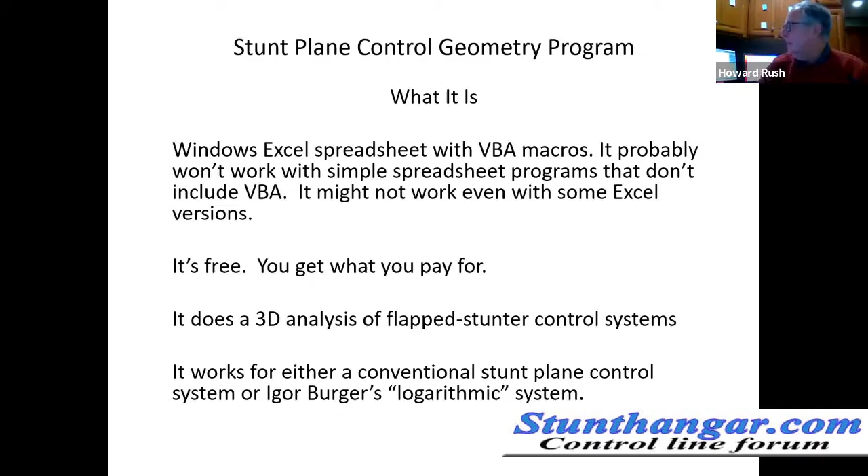Let's see. What it's good for. There's my microphone. I'm self-muting. Relationship between control line motion and control surface motion. So you can see if your control system's linear and symmetrical. If it's not, you can fiddle with the input parameters to improve linearity or symmetry.

And it can show you the mechanical advantage your system has over control surface aerodynamic hinge moment. It takes a torque to deflect the flap into the wind. Elevator, not so much, because the elevators kind of go in the same direction as the wind, and it's little. But deflecting the flaps requires pretty big torque on the flaps. And this torque we call control surface hinge moment. So you stunt people think of moments as a distance, but in general engineering talk, a moment is a torque.

And there's a spring between your handle and the airplane, namely the control lines. They bow back in the wind, and they also have elasticity. And so you're controlling your airplane on the other end of this spring and trying to bend the flaps into the airstream. And I think that you want to minimize the difference between the force in each line to minimize the spring effect. And therefore, you want to maximize the amount of lead out travel per unit of flap deflection. I put in a wrench analogy there.

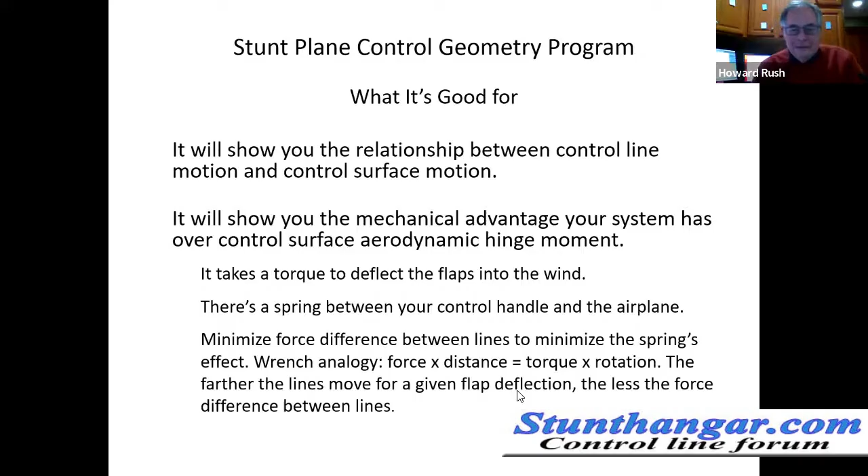I think the hinge moment thing is important, and having leverage over it is important. And how to use the program. It says, behold the definitions and assumptions. Now, at this point, I have to switch programs, and we've been practicing this, and I'll see if I can do that. When you open the program, it comes up on this definitions and assumptions page.

And you look at that to see what I call zero and which way is positive, like sideways is positive out the right wing and stuff like that. And the assumptions, like, doesn't work for self-centering Bellcranks and a lot of stuff. So check that out. And then now back to, we'll return to the program shortly. Okay.

Behold the variable names and signs on the PDF picture. Along with the program, I throw in a couple pictures that have the names of the variables on them and look like this, which you can't see here. And the variable names are kind of funny, but what they are is the names I use in the VBA program. And this uses standard airplane sign conventions, which I don't know whether you know or not. But the sign conventions are on here.

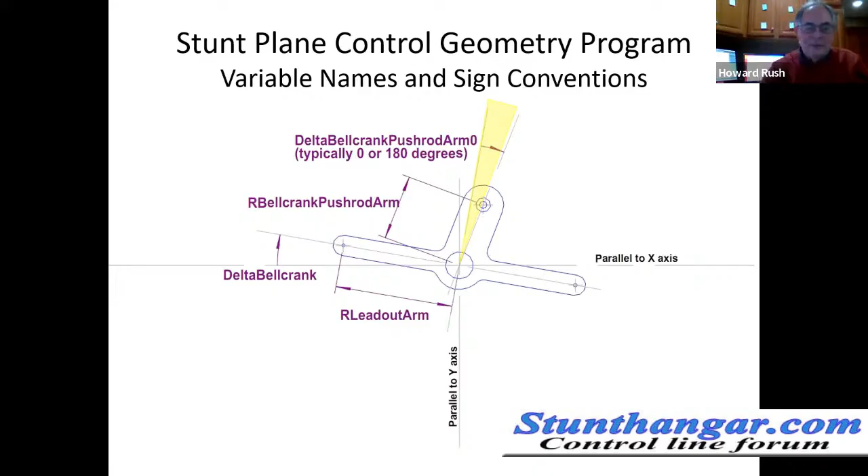Let me call to your attention the Bellcrank cartoon. There's one parameter here that turns out to have a big effect on the control system symmetry and linearity. And it's this guy right here, from the perpendicular to the axis of the bell crank. And I'll show you more about this later. But when you're messing with this yourself, be sure to fiddle with this dimension. Try stuff out because it has a big effect often. Okay.

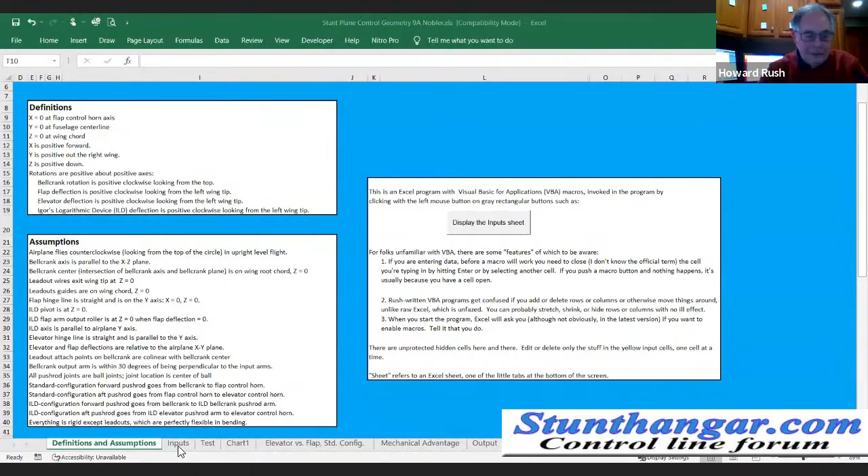Now it says, go to the input sheet, your values. Now we're supposed to show the input sheet. It's supposed to show the input sheet. Here is the input sheet where you put the stuff. And you see that? See the yellow stripe there? Yes. Yeah, good. And let me point out the sign convention thing. Heed the sign conventions.

By standard airplane signs, distances out the left wing are negative. So the distance to the left wingtip where the lead out guides are is a negative number. Well, when I put in Nobler numbers as an example, this is a Nobler, and I forgot to make this negative, and I spent much of last Saturday trying to get this thing working because I forgot to put in a negative number.

Likewise, the elevator, zero in the fore and aft direction I've defined as where the flap control horn axis is, the crack between the wing and the flaps. And so the elevator's aft of that, and in our sign convention, the X is forward. So that's a negative number. And I've mistakenly made a canard before by entering a positive number there. I should have a warning that pops up when you enter positive numbers for these things. It ought to be negative, but I don't. So just be aware. Some things are kind of weird.

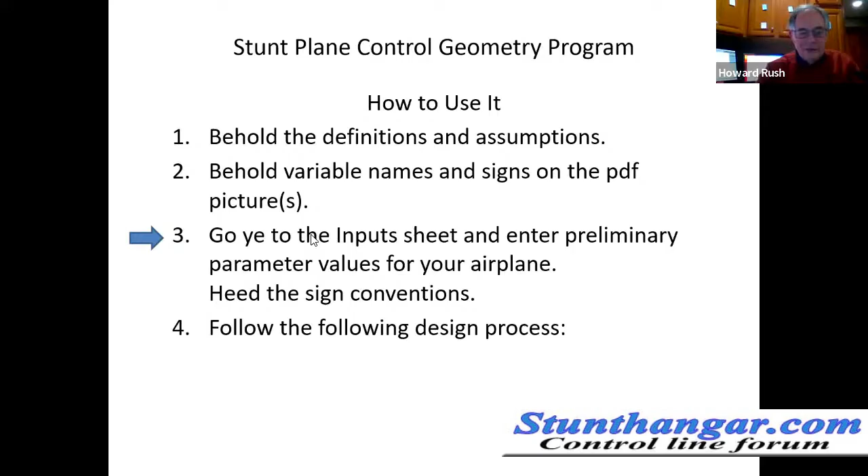Now, we'll talk about the design process, what I think the design process ought to be. And I'll have to go back to, so that was a pretty fast transition, all of the design process. First, pick a maximum flap deflection. Don't pick any more than you need because you'll be sacrificing leverage over the system. Can you see that now, Charles? Pick maximum flap deflection. Good.

Yes. Sometimes I see things here and I'm the only one seeing them. The default is 30 degrees, and I've always used 30 degrees because I don't know what the maximum flap deflection ought to be. And I don't know if the program works for anything else. It probably does. I suspect that we don't use any more than 20 degrees. I got instrumentation on my airplane, but I haven't recorded it yet. So I'll find out how much my airplane takes and then report that, but it might be different from yours.

We put a camera on one of Paul's airplanes once and watched its flaps, but it wasn't calibrated, or looking back on the fuselage, it's hard to tell how much the flaps move, and we didn't put any marks on it. I should have taken a Sharpie and put a mark on there at 30 degrees or something. Well, he wasn't looking.

Next, pick a handy flap control horn size. And what are we doing nowadays? About 1.5 inches. Yeah, use that. It's an independent variable, flap control horn size. Well, the way I do it, it is.

And what this does is just rotate the bell crank relative to the direction the lead outs go out. In these cases, I think they might have been ARFs, and who knows what it was beforehand, so they might have come out someplace closer to perpendicular than they started. But it's hard to fix an airplane after it's built. Use as much bell crank travel as you can get, I think, without making the system too perverted.

When you go through this iteration, I start with a lot of bell crank travel and go from there. To set the amount of bell crank travel, you change the ratio of bell crank pushrod arm radius to flap control horn radius. If you start with a given flap control horn, you make the distance from the bell crank pivot to the output hole smaller. That increases the bell crank travel.

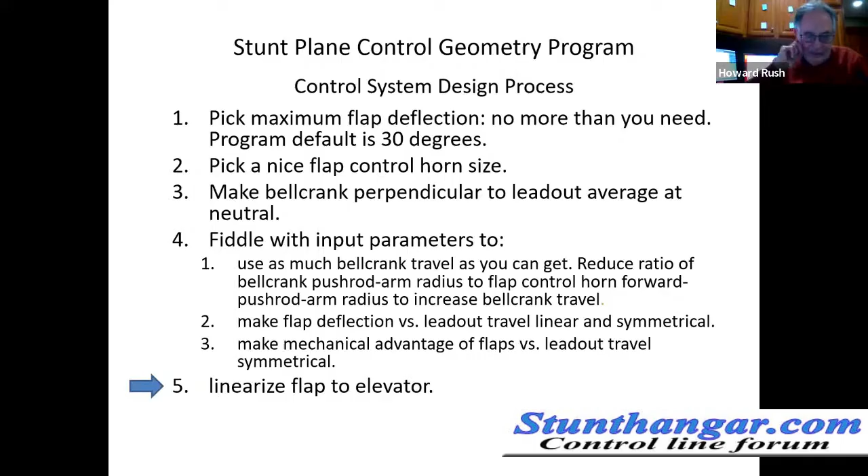After you pick a bell crank travel initially, the next thing you do is fiddle with the other parameters to make the flap deflection versus lead out travel a straight line and symmetrical, and use as much lead out in one direction as the other. And then look at the mechanical advantage sheet and try to make that symmetrical, mechanical advantage versus lead out travel. I'll show you the pictures here in a little bit. Let's see. Then after that's done, linearize the flap to elevator.

I'll go ahead and talk about that now because it's here. It's easy because it's all in one plane. Typically, the control horns and the push rod are not too far off from a plane. So you put the control surfaces in neutral and run the push rod between the control horns, make the control horn uprights perpendicular to the push rod, and you're in business. Okay.

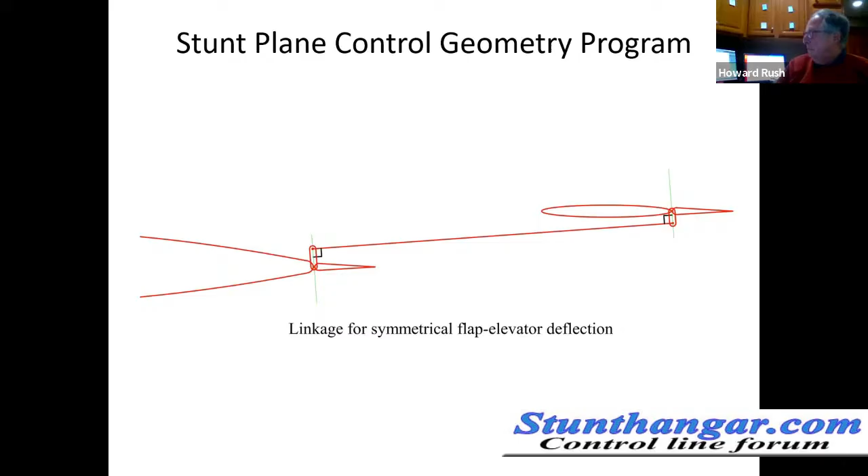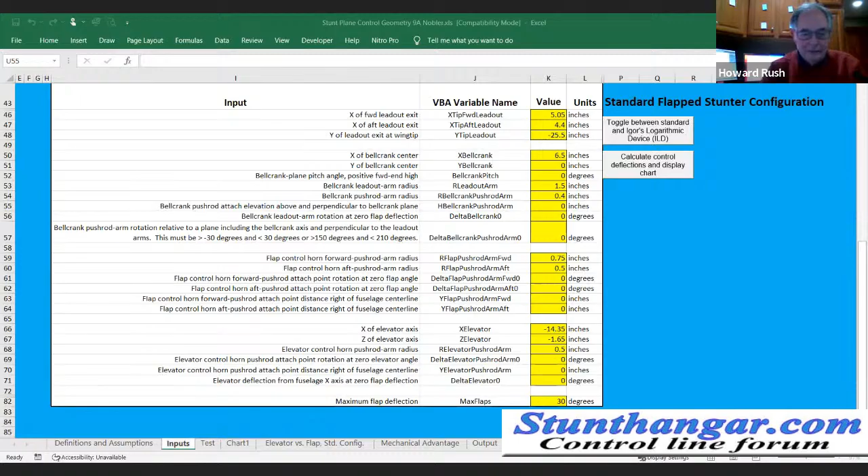Now back to the Nobler. So here's the input sheet to the Nobler. And once you've put in the initial numbers, you push that button and it will lead you to this chart. This shows the green line here, which is the most important thing. It's the flap position relative to lead out travel. This x-axis is lead out travel, and the other things are elevator and bell crank.

This shows the Nobler on the plans that George sent to Top Flite, which I got via Bob Emmett. The bell crank moves almost as far as it can, so it has quite a bit of leverage over the controls, but the shape is awful. Notice that it takes, let's see, is this up or down? Aft lead out is up, I guess. 2.5 inches to get to full up, and 3.2 inches to get to full down. So it might be more effective at the top of the hourglass than it is doing triangles. It might not be able to do triangles too accurately.

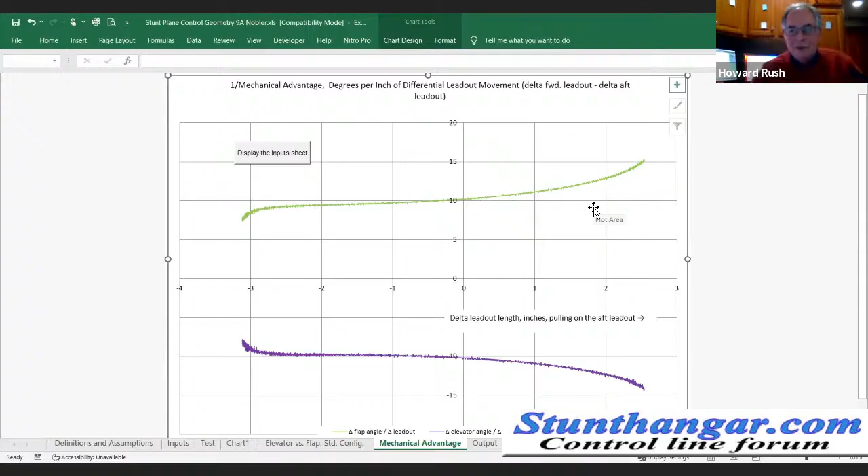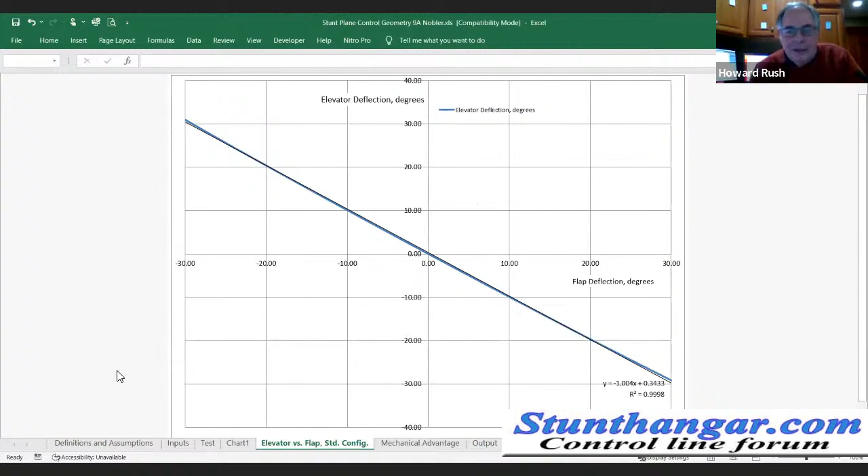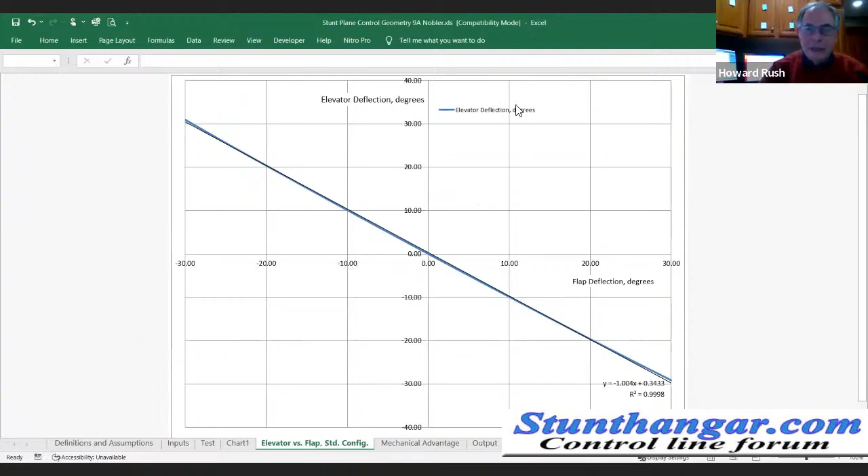Oh, yeah, this is an aside: elevator versus flap on the original Nobler is 1-to-1. You can't see it. Now you can. Yeah, you can. And I've heard rumors that it was not 1-to-1, but it is on George's drawing. Okay. Now, here's the tricky part. Well, I guess I can get there this way. I changed these items, these in the gray cells. You see them, Charles? Yes. See the gray cells. And there's the famous push rod arm rotation on the bell crank.

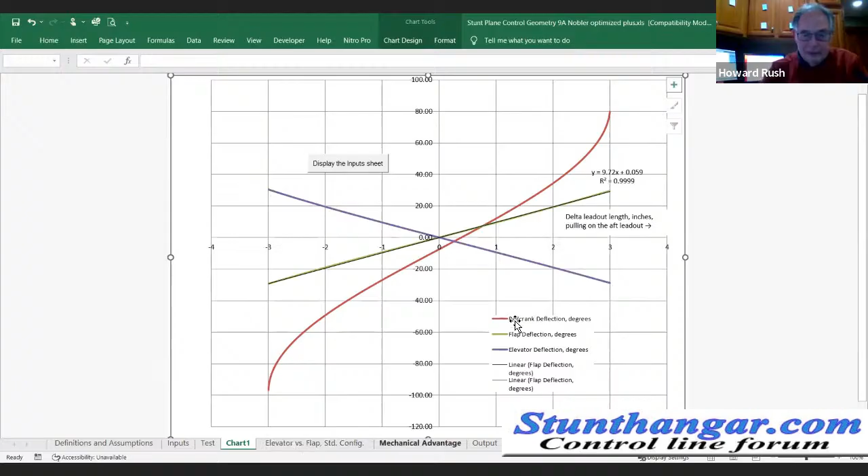Go into this chart, see, I was able to move the bell crank even more. It's almost plus or minus 90 degrees. It goes to 100 here because it's askew a little bit. It doesn't go through 0, because the lead outs go back from it, I guess. And this line's nice and straight. And mechanical advantage, isn't that pretty? It's all symmetrical now. Less than it was. And so that was pretty cool.

Now, let's see. The mechanical advantage improved by 6%, but I tacked on a 5-inch or a 4-inch bell crank just to see what would happen, and got 41% improvement in mechanical advantage, and it didn't deteriorate the shape too much.

Now, here you see a couple of bell cranks there, Charles? Yes. Yeah, amen. These are the changes I made. I moved the bell crank forward. Red is the new one, and rotated it so it's perpendicular to the lead outs. And here the output hole is askew 7.6 degrees, wasn't it? Something like that. Yeah, 7.6. And I moved the flap control horn forward.

That's where it came out. And I've been telling people that you can optimize this with the flap horn either straight up and down or forward, and it doesn't matter. But in this case, it did. And tentatively, John Miller is right and I'm wrong about the tilt of the flap control horn. So I won't admit to being wrong quite yet, but I'm pretty sure that he's right and I'm wrong. The flap control horn should tilt forward.

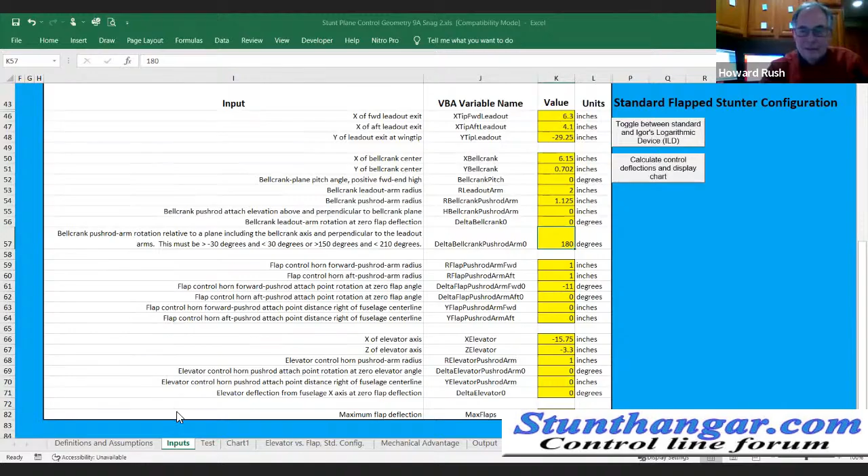Now, see the input sheet, Charles? Yes. Amen. Okay. And behold that this starts out with the output from the bell crank on the left side of the bell crank. This is the famous reversed bell crank. And looking at what these numbers give you, this is the stock Snaggletooth 2. The flaps versus lead outs line, the slope is negative because of that reversed bell crank. The reversed bell crank doesn't have any effect on the kinematics, but does on some gyroscopic stuff maybe.

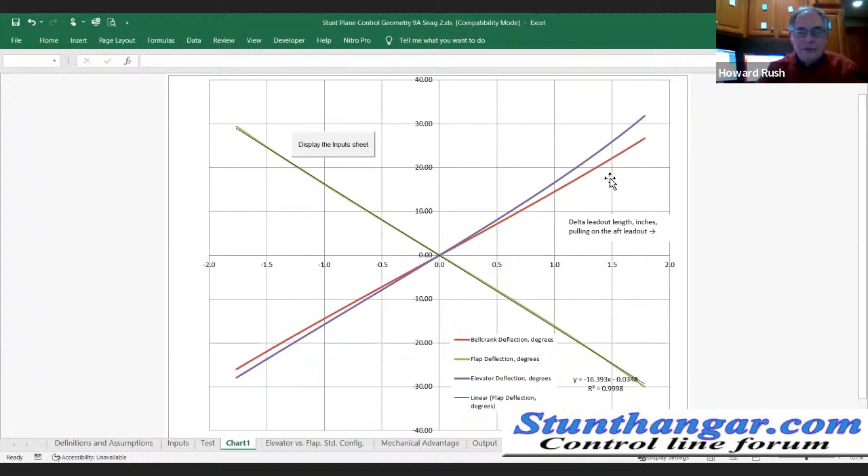But the striking thing about this, I think, was that the bell crank doesn't move very far. It only goes like 26, 27 degrees in either direction. And mechanical advantage, this is the flaps here, that's elevator, which I'm not too excited about. Mechanical advantage is nice and symmetrical, but it's not very advantageous. This is 1 over mechanical advantage. 15 is pretty big.

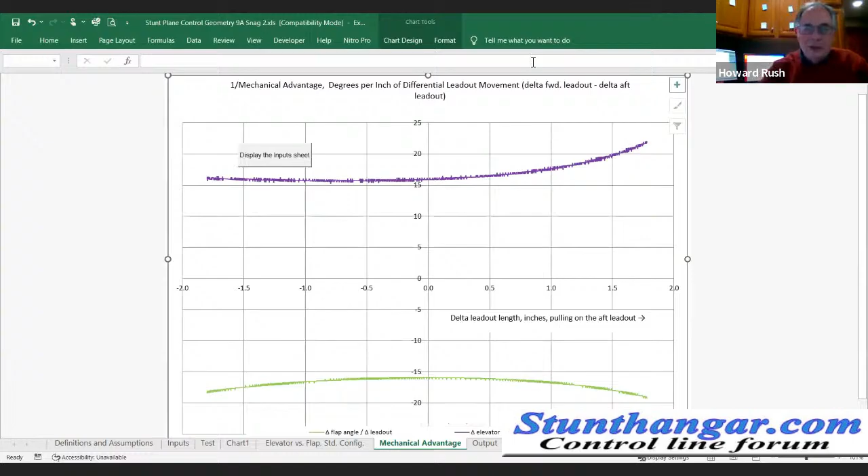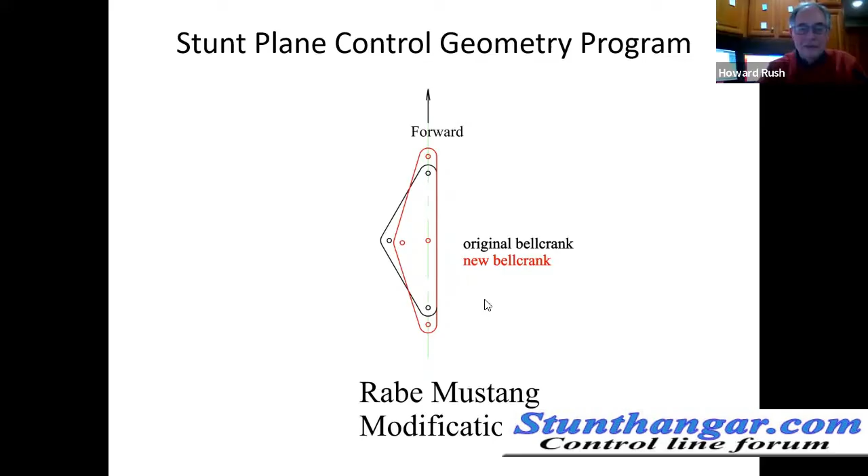Now, according to my notes, we go back to the other thing. Here's the first change I made to the Mustang. I tried to get more mechanical advantage without messing up the symmetry, and I couldn't do it. So I gave up and put in a 5-inch bell crank. And just putting in a 5-inch bell crank and offsetting that hole came up with a pretty good control system and more mechanical advantage. It was symmetrical. Then I got greedy and tried to get even more and reduce that distance farther, and I had to tweak the flap control horn a little bit. And came out with something that wasn't quite as pretty, but got more mechanical advantage.

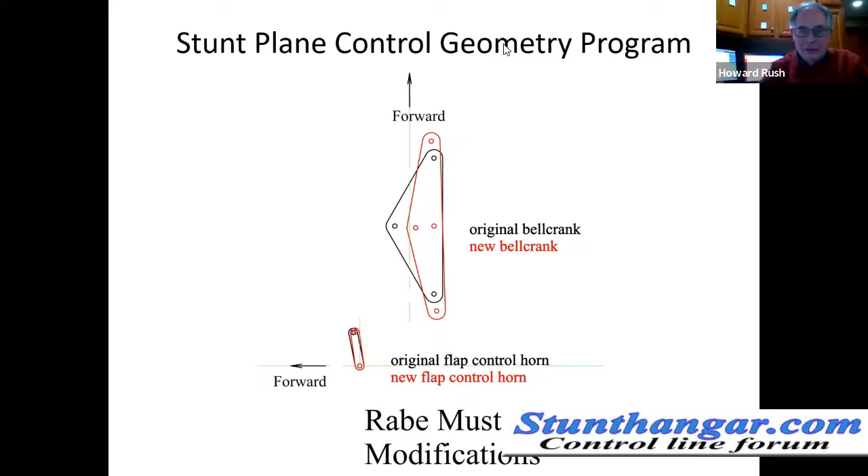Now I'll show you the plots. See the 3 curves there? Yes. Hey, good. And this was the original flaps versus lead out travel. Lead outs don't go very far, less than 2 inches in either direction. And it's kind of symmetrical, but they don't have much mechanical advantage. The first change gave a pretty nice curve, got a lot more lead out travel, a whole lot more mechanical advantage, 188% of the original. And then another try. The second picture I showed is 242% of the mechanical advantage of the original. So I'd stop here, I think.

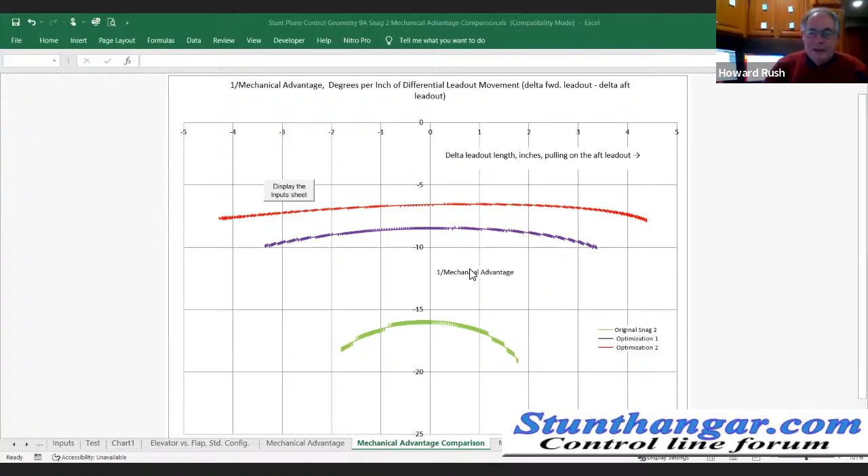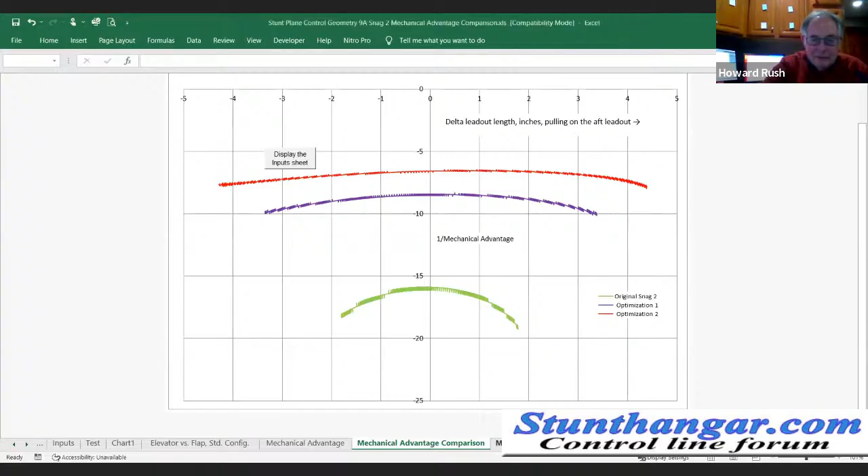But you know, how much mechanical advantage do you need? It depends on the hinge moment, and it's hard to tell what it is analytically. So I just put in a lot in my airplane. I have even more than this, I think, especially full flap deflection. And I also plotted this versus flap deflection, which is maybe more useful. There's the three curves.

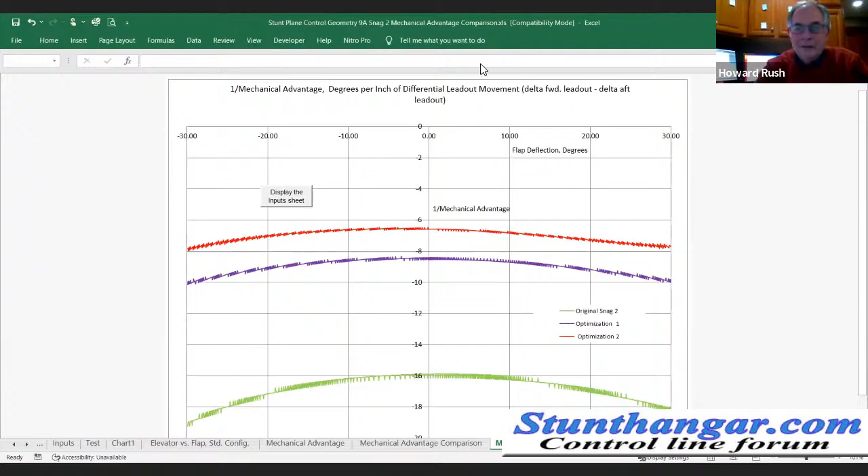That's it for the Mustang example. I have a conclusion or two. You can't fix airplane control problems with the handle. There's nothing you can do, because the spring is between the handle and the airplane. So you've got to do it in the airplane.

And I have an asterisk here because Larry Renger has some interesting control handles. There's probably other ways you can do it. If you make a control handle like Orestes is, which is a strap going around a handle, you can tailor the control spacing versus handle deflection with that, and that might do something useful. The line spacing at the handle is a dependent variable. So once you get the airplane how it's going to be, you just have to pick the line spacing at the handle that makes it work. And if you have a lot of leverage over the controls, you get a big handle spacing.

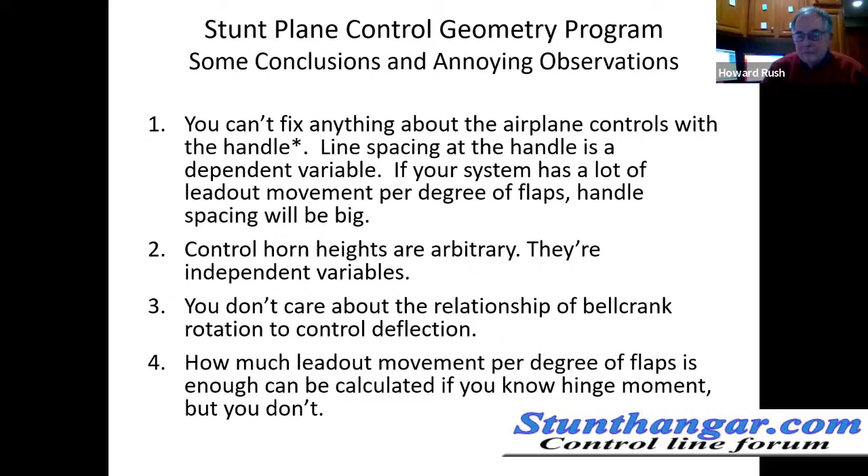Yeah, the idea that the bell crank isn't in the forward and aft plane, that the rear of the bell crank is lifted. I hadn't seen that, but I'm guessing it's common. Well, I did it on combat planes. You can do it to avoid obstacles in the wing, like the landing gear mounts and stuff. I haven't found that it does much, which I guess is good if you have to do it for some reason, but it doesn't help or hinder one way or the other. On previous airplanes, I found that the sideways location of the bell crank was a big influence, but on the Nobler and the Mustang, it didn't seem to matter.

Dave, I see Dave. Charles, Dave, which Dave? Dave Hall is. Oh, there we go. All right, go ahead, Dave. You're still muted. There we go.

I think that would be a tangent effect. So it's going to be pretty small if you're inside the narrow depth of the wing and you've shifted the bell crank only slightly up. I think he was talking about tilting it. Tilting from the plan view, having the output arm, let's say your notional 7-degree shift? No, the other, about the y-axis, rotating about the span. Line attachment point aft high. I've got a picture I could show you, but I'd have to share it. I don't understand the description when you say aft high. High to me is z-axis.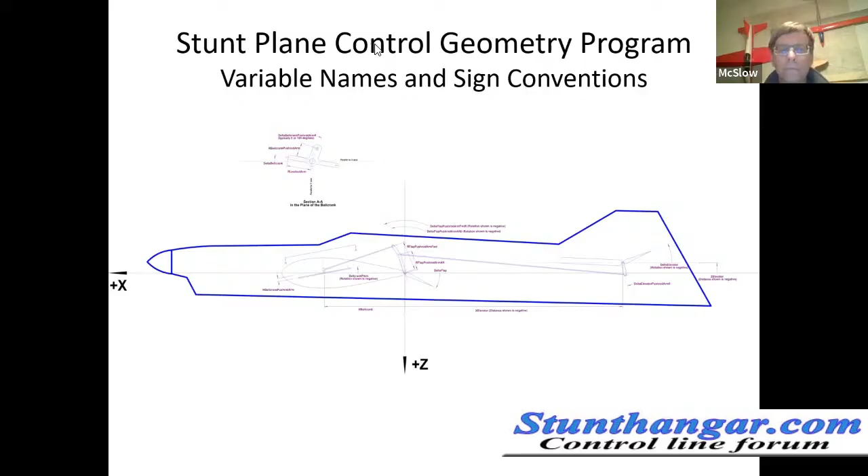I have a question from the chat box by Bruh832. How do aerodynamics and control surface geometry in stunt plane design collaborate for precision maneuvers? And how does pilot skill influence optimal performance? Oh, that's easy. The first part was how do aerodynamics and control surface geometry in stunt plane design collaborate for precise maneuvers?

My mind is blank. I'm sorry. I think that this leverage that I talked about helps precise maneuvers, but that's not the collaboration of aerodynamics. It helps to have a linear lift curve slope, I think. Helps not to have hysteresis in the lift curve slope of the wing.

Where's Paul? Ask Paul. Let me unmute Paul here. Yeah, unmute Paul.

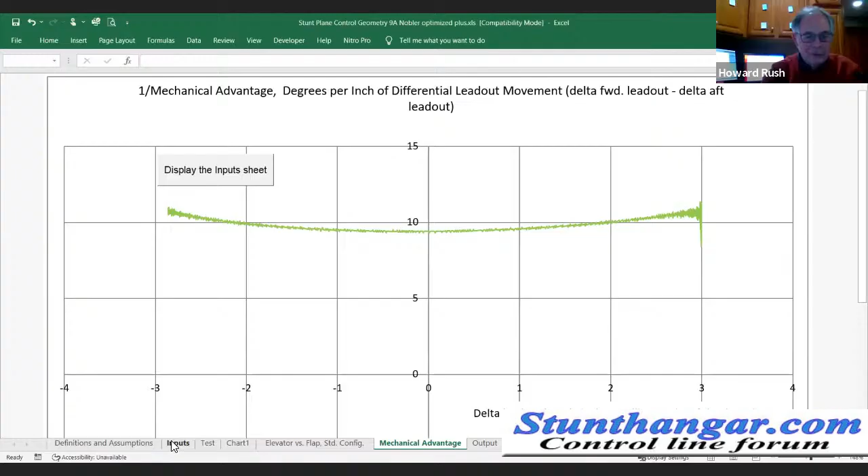I have a question from Doug Moon for you, Howard. Can you go over the input page one more time, please? I'll call it up and talk about it, I guess. A good one would be the Nobler after it's fixed. Yeah, here we go. Oh, did that work? Yes, it did. I double clicked on it and it started working, which seemed to be too easy. Okay. Now you see the yellow and gray stuff? Yes.

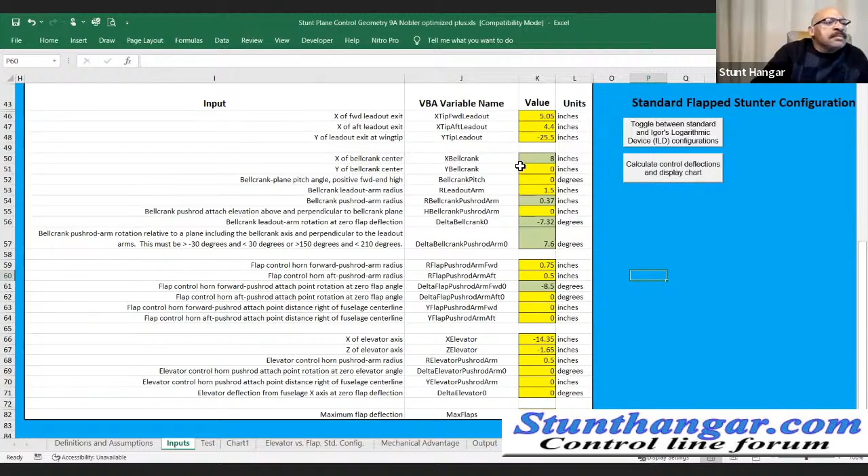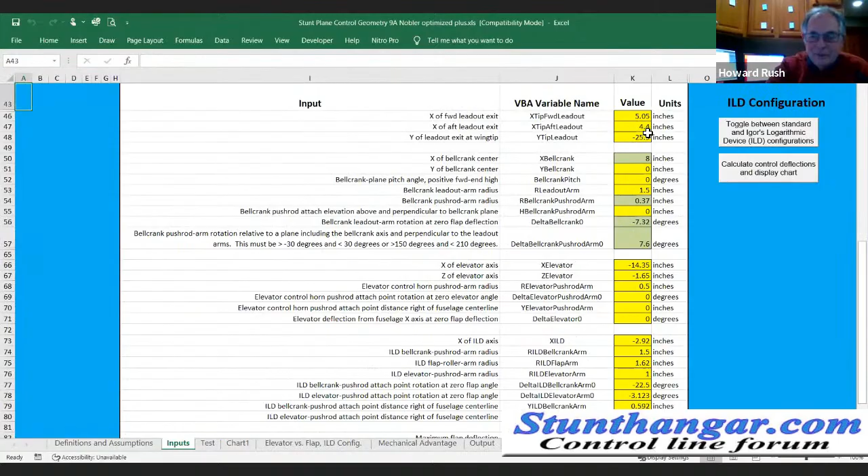These are the inputs available to you. If you have an Igor system, you press this button and it switches to the inputs for the Igor system. Yeah, can we get it back? Yeah, toggle back. Yeah, here's the conventional control system. I could go through each one.

Please. Okay. Distance forward of the flap hinge, which we assume is straight, or the flap control horn if it isn't, of the forward lead out, distance forward of the crack of the aft lead out, distance of the lead out guides, the average lead out guides spanwise, like from the center of the airplane to the left wing tip. Distance of the bell crank forward of the crack, the crack, namely the flap control horn, where the hinge line between the flaps and elevator, or the flaps and wing.

Yeah, that had an effect on the Nobler. I haven't noticed it on other airplanes. You'd think that once you get this control system, you just plunk it down in any airplane. And I don't know why you can't. Once you get it figured out, that's sort of a mystery. This is the distance the Bellcrank axis is to the right of the airplane center line. I fiddled with that. I couldn't see that it had much effect.

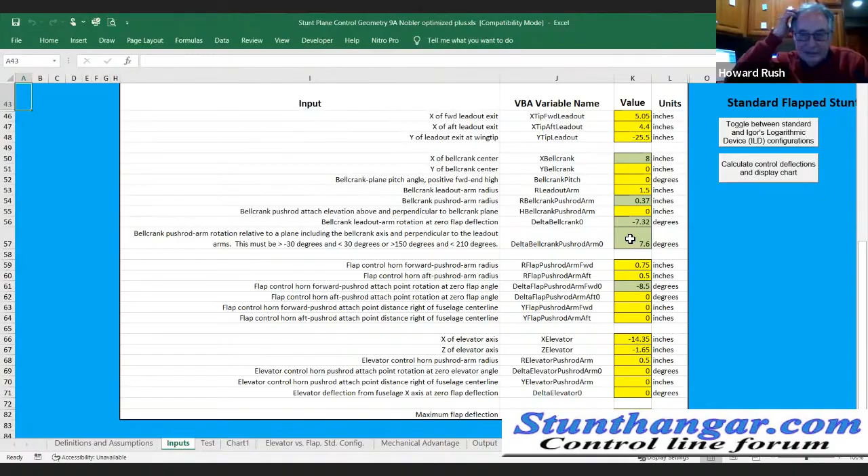And this is the weird Bellcrank output arm rotation, pushrod arm rotation from the perpendicular to the Bellcrank axis that does so much. You fiddle with that, you'll enjoy the effect.

You know, I've been thinking about just wrapping some loops around this and having it automatically iterate and sit there for hours and come up with a really cool control system. But I kind of don't know what to have it look for. What's the optimal? What's the performance index?

Flap control horn radius, 1/2 inch and a nobler. And the flap control horn arm rotation at neutral. That's the one that John Miller tells you ought to be perpendicular to the push rod. And maybe so.

What is this? Oh, this is the aft push rod, the one going to the elevator from the flap. Rotation of the aft push rod, aft control horn. Sideways location of the push rod arms.

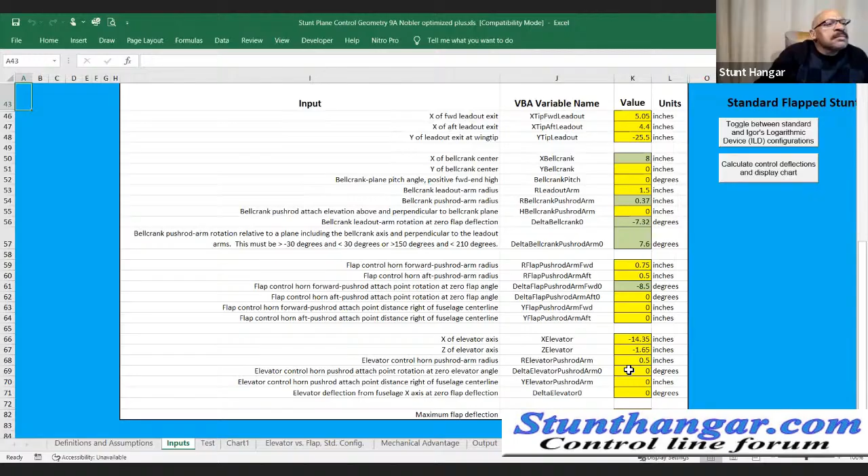I'm sorry, Paul. Try it again. He's speechless. Try it again, Paul. Sorry. Okay, there we go.

Now, the question, I'm trying to remember: is a 5-inch bell crank worth doing? I think the question is whether the larger bell crank is worth doing. Yeah, like you say, if you go to a larger bell crank, you're also squeezing it down at the lead outs and then expanding it back out at the handle. Is there more friction at the lead outs because of that? Maybe. How significant is that? I don't know. I don't know what the coefficient of friction is between those lead outs and your little guides and what they are, etc.

But you've got to get around all the structure in there too. And the wing spar is a problem. And if you've got landing gear in the wing, you've got structure in there for the landing gear. And so this is always the battle I face. I'm a structures guy. I put the structure in first, and then I try to put the bell crank in. I hate kinks and stuff in my primary load path. So, yeah. But sometimes you have to. But yeah, it's a battle if you swing that lead out around more.

I guess if you made a 6-inch bell crank, you might run into some of the structure for your landing gear, and it's going to come back, and whether it's going to clear the spar depends on how far you move it, I guess. Yeah, wouldn't have to move as far. Well, your push is always to move the bell crank as much as possible. Well, yeah. Come on, just say yes, you got it. That was hyperbole there.

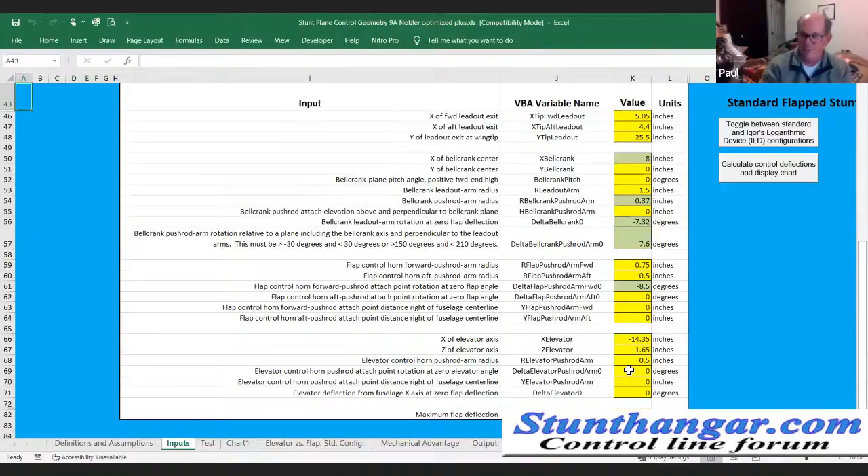Well, that moved all of the stuff way inboard, and so your push rod and Y on your flap, to the elevator and the bell crank were way off center, and so I had to counter that by moving the bell crank. That was really cool because you could just move the bell crank and see the impact it had on the entire control system. It's funny, but it ended up being farther outboard. It's a reverse bell crank, of course, but it went farther outboard to get linearity in the system. Without that, I would probably not have put it as far outboard. I'd have put it more inboard, but it would not have been linear if I had not paid attention to that. So that was very interesting, and yeah, it does really good things.

You just have to pay attention to the sign convention. You'll do something and just think, well, that doesn't make any sense. Why did it do that? Well, when you get it in backwards, it'll do that. Yeah, I better put in some warnings there.

Any more questions? Oh, I did have one more question. All right. So your starting input is to put the bell crank perpendicular to the lines as they go out to the inboard tip. Yeah. That assumes at the beginning that you know exactly where the leadouts are going to be. Well, if you build the same airplane over and over, you get a kind of a clue. What you do is you call Paul Walker and ask him, where is the fashionable lead out position this week? This week, just this week? How about this day?

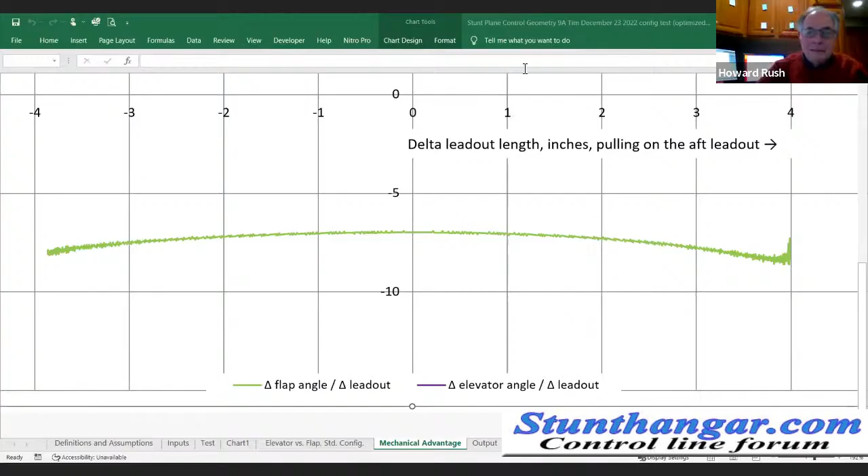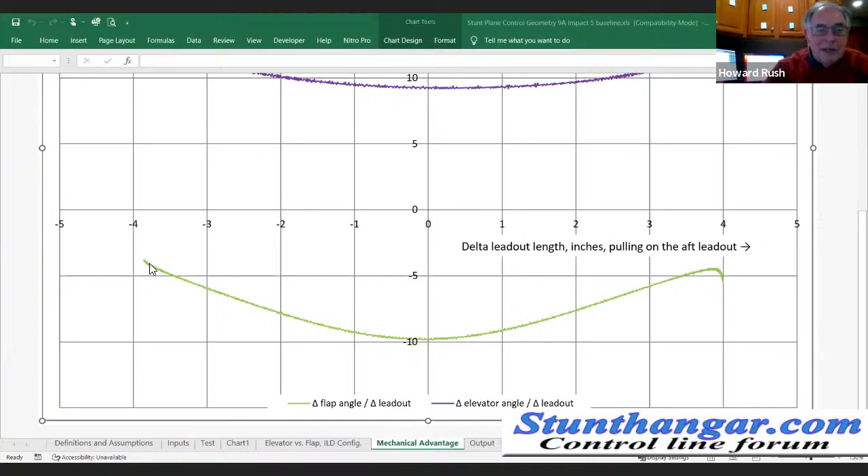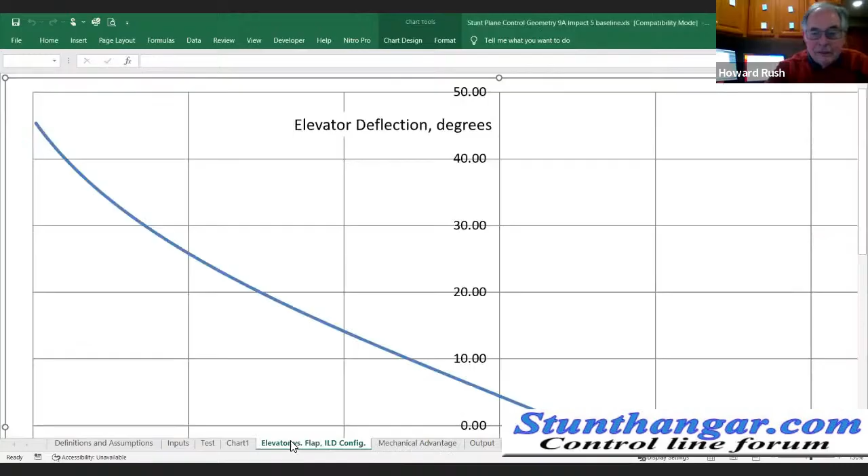this is with the ILD system. And this is another aspect of it. Not only rotating the airplane easier in squares to make squares look good, it has a lot better mechanical advantage toward the maximum control. It's concave in the other direction. And what elevator versus flap looks like on this is. There you go.

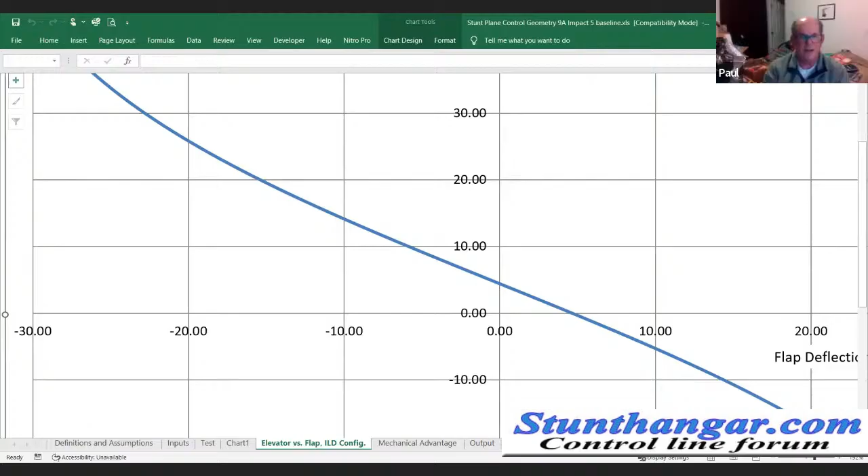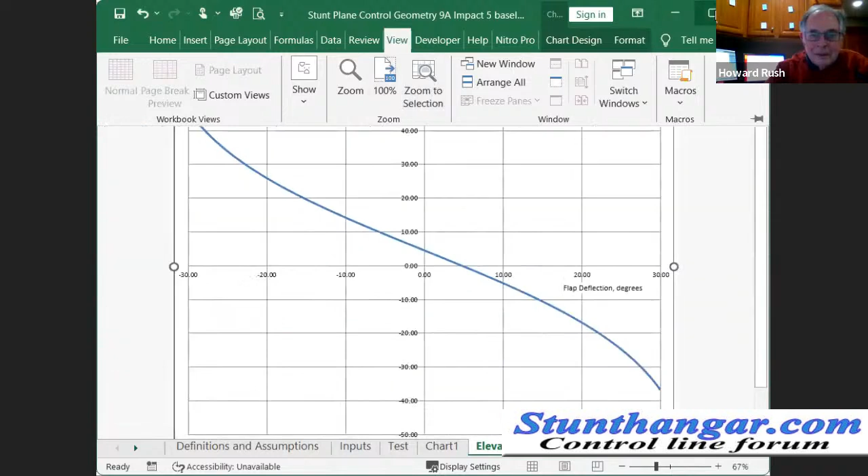Okay. There's something in the way of it. It's a little bias there. Let me. There it is. See, at least out to 15 on that, it's fairly straight. It starts to slowly move to 20, and then it really takes off. So if you're just moving them plus or minus 20, you're getting a little bit, but it's not what it could be. So I tried playing with setting the flap deflection up to 20 and seeing if I could force it to give me that non-linearity approaching 20, and I could never get it to work.

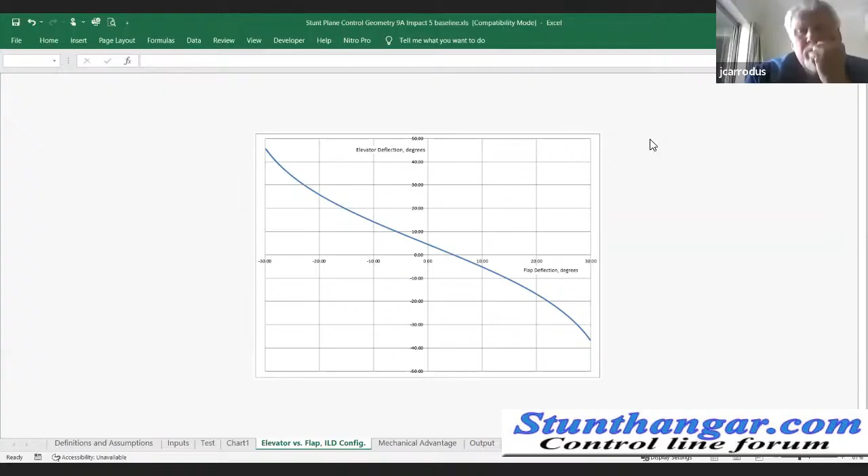Now what Bill Werwage did long ago, and I think Chris Rudd reproduced more recently, was a cam following thing. That was a funny thing. It had a push rod that went to the elevator, and then another push rod that went from the elevator back to the cam following thing, which drove the flaps. You'd think there'd be an easier way to do that? You'd think, yeah. Okay. Fascinating.

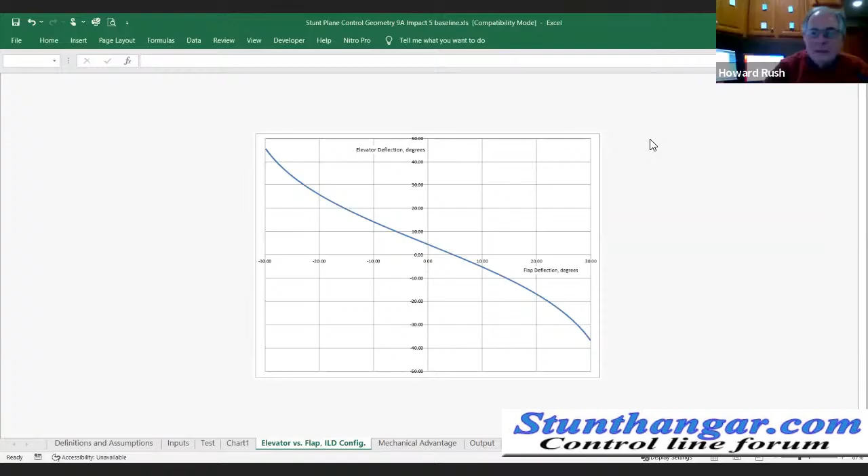Just a second, David. Jim Vornholt, you can go ahead and unmute yourself, Jim. You had a question, Jim? No, I just couldn't get the unmute off. I was wondering what was going on. Yes, I know it's a little bit different format tonight. During Howard's presentation, we didn't want any interruptions, so I had everybody come in muted, and they couldn't unmute themselves unless I gave permission. That's why it's a little different format. Okay, I understand. But you're not in the doghouse or anything. You're all right. I thought I'd done something wrong or something. Yeah, well, thanks. I appreciate that. You're welcome. Okay, thank you. All right, go ahead, David.

David Hall. Yeah, a couple of comments. So I think for John's question earlier, it's not a single piece of hardware that dictates black or white that it's nonlinear or linear. If you looked at the charts that Howard was just showing over, let's say, a significantly useful range, you could do a linear curve fit and look at the R-squared value, and you're probably going to be in the 0.99s. And so to somebody holding a handle, it's linear.